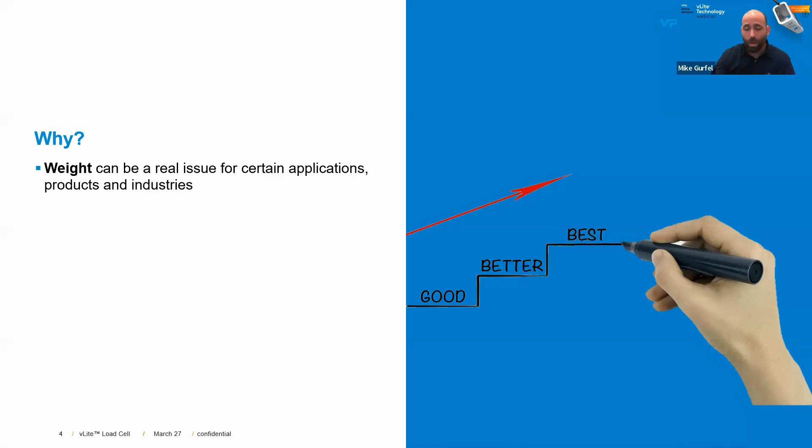Now, as I mentioned, we always ask ourselves why we decided to make the vLite product family, and there are several reasons, so we'll cover some of them now. As you can imagine, weight is always an impact, especially for applications or industries which are weight sensitive. That's one of the key factors behind the vLite being created.

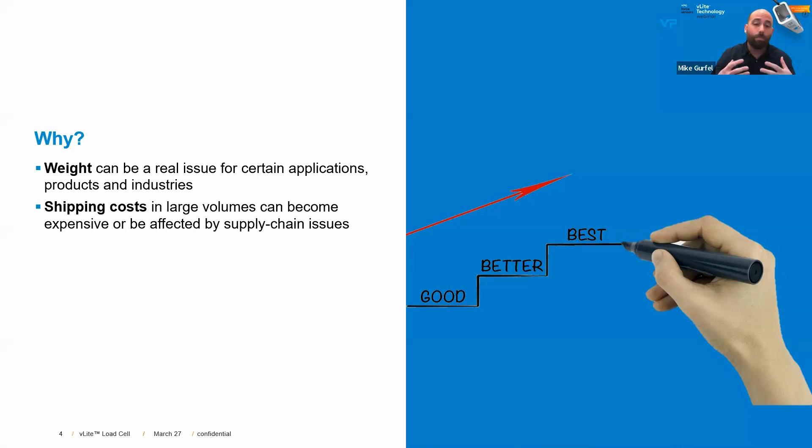Shipping costs, especially in high volumes of heavy load cells, can also be a very costly impact. As we witnessed a couple of years ago with COVID and the supply chain issues, reduced weight can be a very positive factor in shipping load cells. Sustainability, even though some companies don't put it in the forefront, is always something being talked about—going green is a buzzword—so that's also a consideration both for us and our customers and other manufacturers.

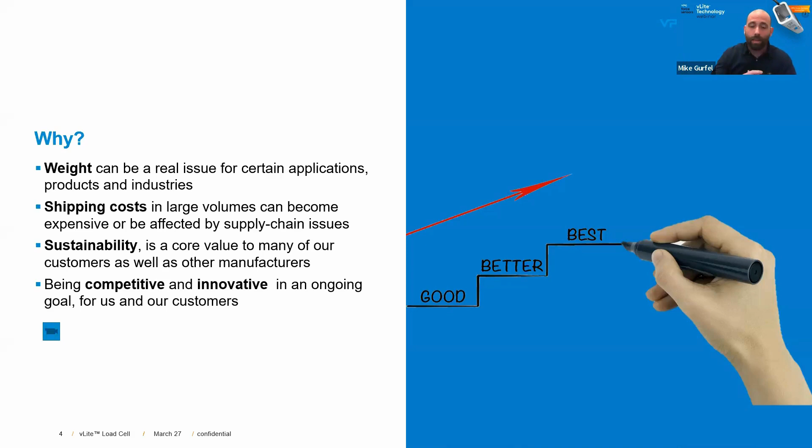And certainly not least is being competitive, being innovative—always thinking about what I can do differently, what I can bring into the market. And this is where the vLite product comes into play.

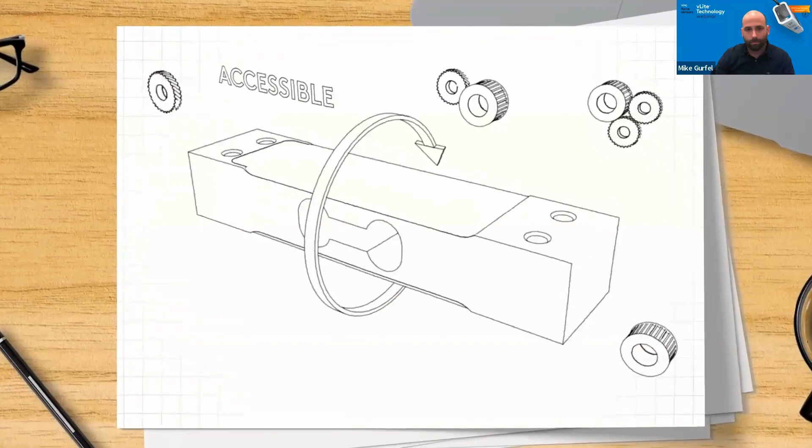Innovation doesn't happen overnight. You need to put in the time. Let's say you want to reinvent load cells—you clear your schedule and start on market research. There's no market category for your idea, so you make one. The market wants precision performance that's more accessible, sustainable, and cost-efficient. You spend years exploring innovative materials until you find the perfect one, which presents challenges you never expected. So you spend a few years on these until, eureka, a whole new concept. Time to seize the moment, just as soon as the market matures technologically. Now it's really the moment. VPG Force Sensors presents an overnight success.

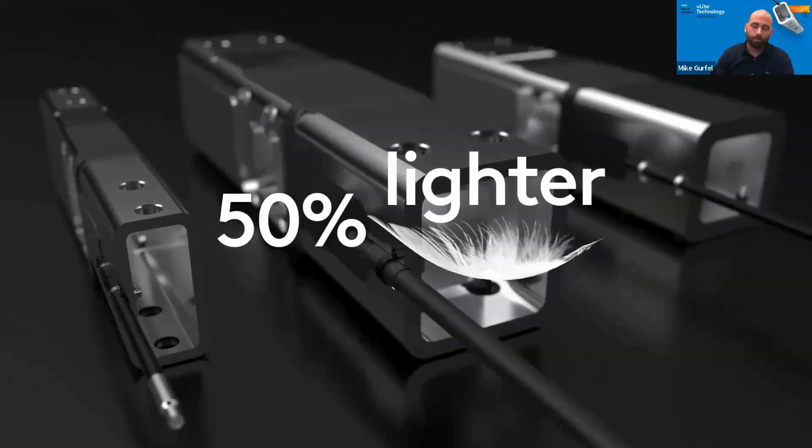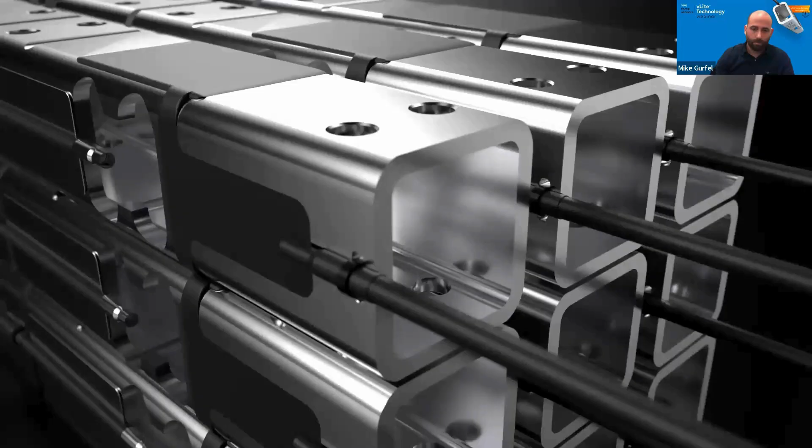VPG's patented vLite technology has reinvented load cells. Using an innovative hollow beam made of aviation-grade aluminum, vLite load cells provide best-in-class performance at half the weight of standard cells. With off-the-shelf models exchangeable for equivalent solid cells, vLite is ideal for a broad range of applications, whether as a single-point load cell or in any custom configuration. Meeting and surpassing all industry standards and benchmarks, vLite has been rigorously tested across loading arrangements, materials, and geometries. Since it uses less material, it has a lower carbon footprint and simplifies shipping and storage—because that's what nonstop innovation gets you. See the vLite difference. Visit us today.

Okay, so now we're gonna cover some of the value points that the vLite has to offer. First and foremost will be the lightweight, as mentioned, up to 50% lighter than traditional load cells. So obviously it has a direct impact on reducing the shipping and storing costs of the vLite products. It's also an ideal solution for low-weight applications, portable applications, basically any application where weight can be a very serious factor. It also allows our partners and customers to create a lighter product with existing designs, or even give new ideas and new possibilities to create a product using a load cell which almost halves the weight, which has very positive implications on the end product.

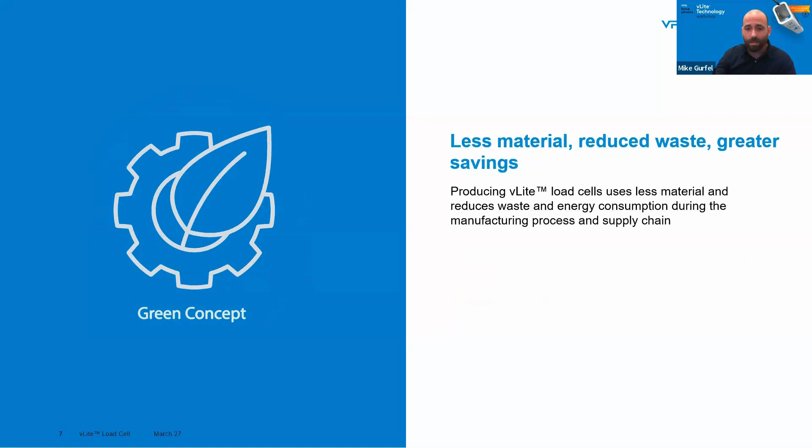If we mention sustainability and going green, it's also something to take into consideration when we're talking about less material. Reduced weight equals greater savings, so it's much more sustainable, both in terms of disposal and recycling of the product. Even if one of our customers or the company itself is not really highlighting eco-friendliness, just by joining forces with VPG Sensors and using a vLite load cell, they can also be part of our sustainability efforts to go green, reduce waste, and reduce the carbon footprint. And speaking about carbon footprint, this is affected throughout the product lifecycle, from the production process all the way to shipping until it arrives to our end customer.

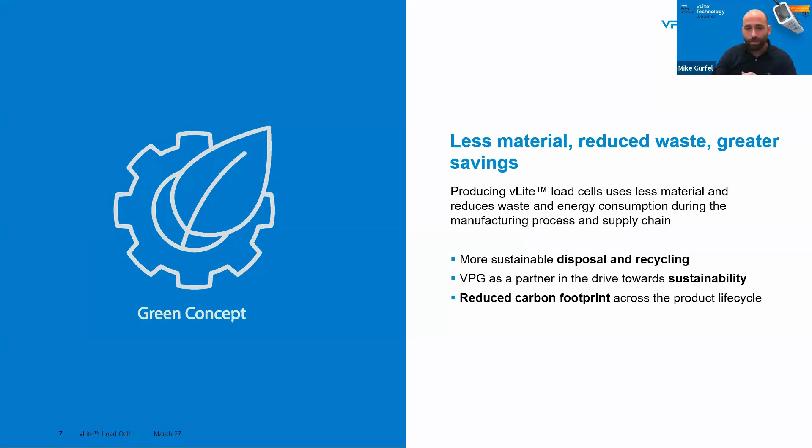Something very important to note: usually when you get a lot of pluses and a lot of value, you have to compromise on something. Here, no compromise is needed. You still get VPG Force Sensors' renowned precision, reliability, and accuracy of the load cells. It's still easily exchangeable, so no heavy lifting from the customer side to implement a load cell, even if you have an existing application with an equivalent load cell—it's almost a plug-and-play solution. And it also comes with a comprehensive 2-year warranty, so it's basically a win-win situation.

So, which industries, products, or applications can benefit from a vLite product? For this, I'm going to hand over the floor to Mark, who will probably be able to shed more light from his experience and his engagement with customers. Mark?

Thanks, Mike, I appreciate it. The vLite is an incredible advancement in load cells. I've been in the load cell industry since the early 80s, and this is the first thing we've seen that's really moved the needle as far as moving into high technology.

So if we look at what industries can benefit from the vLite, we've got packaging. Within the packaging industry, there are all types of automated processes where products are weighed as they're going down the assembly line. The vLite is designed as a single point load cell, meant to be used with a platter on top of it. This can weigh any type of product as it's being packaged. It can also be used at the end of packaging to verify that, as you know, when you buy something, it always says the content is verified by weight, not by volume—so that weight is verified.

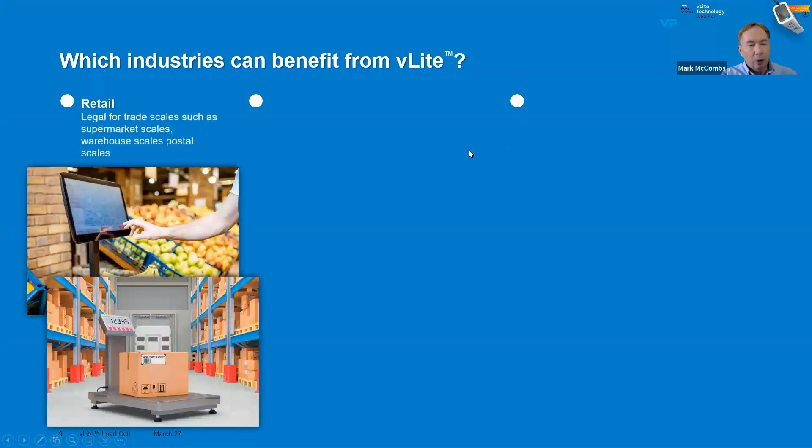And in medical, which is something close to me—that's a segment I manage—this is incredibly useful within medical beds. Within the medical bed itself, the vLite is a very lightweight load cell and can be used for different types of applications, not only in medical beds but within stretchers and also within incubators. In addition to just the basic weighing of patients, it can be used for different types of fluid monitoring, such as hysteroscopy machines or any type of saline monitoring used in procedures. So it really lends itself to that.

And also, as we talked about packaging, let's talk a little bit about retail—so retail scales such as supermarket self-checkout. If you've done self-checkout, you'll notice sometimes you put something down and it asks you to rescan it.

What's happening is that self-checkout is actually weighing what you just scanned to make sure that what you scanned is actually what you're putting in your bag, to make sure that you're paying for exactly what you purchased.

And then also for warehouse type applications, you can imagine the vLite being used within a platform scale, a small scale, aircraft industry, as well as baggage weighing at kiosks in airports. So very versatile. The single point load cell is probably the most versatile load cell you can buy for any type of different application. They can be used singularly, or in pairs, or even four, one in each corner, like a platform scale.

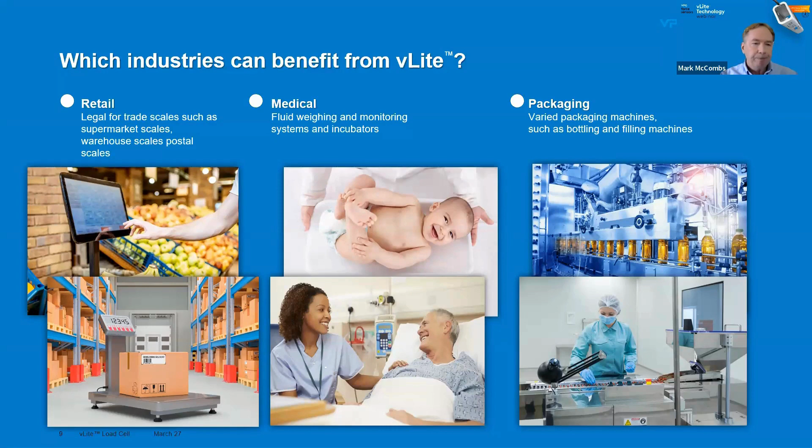So the vLite product line currently consists of 4 model families, and we're going to bring you a quick overview, and later on Rahav will do a deeper dive into each model family. So you have the model 0022, model 0031, model 0042, and model 0038.

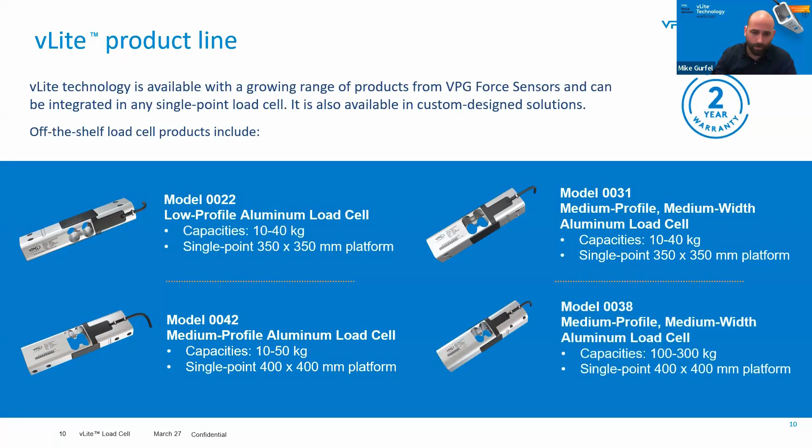Now, in terms of certifications, since it's something new to the market that we worked quite a lot on before launching it, the vLite product line is US patented and NTEP certified. Every load cell model, between 10 to 50 kilograms, is NTEP certified with US patent and worldwide patent pending. So you can expect some more certifications, as well as OIML certifications, coming in the very near future.

And to give you some more information on that, as well as going deeper into each one of the models, let's have Rahav join us.

Hello, everyone. For some reason I'm not allowed in on my video, but hopefully you can hear me. Yes, now we can hear you, and we're going to work on the video. The video is not starting, but I will continue.

So, hello everyone. We're excited to have this webinar with this innovative product line. As mentioned before, and as the vLite name implies, it is a very lightweight load cell.

So if Mike, if you want to continue the slides, here I am. Thank you. So hello everyone, again. I will go briefly over the major models of the product line.

So if we start, the first one is the 0022. If you're wondering what the numbers at the end signify, that's the height in millimeters. So the 0022 is 22 millimeters high, and it's equivalent to our 1022, which is also 22 millimeters high. It's designed for platforms up to 35 by 35 centimeters. Currently, we have it in 10 to 30 kilograms, and the specification matches the 1022 or any equivalent competitor. We have this with through holes as seen here, but we also have a version with integral threads. So with the integral threads version, it's a direct one-to-one replacement with any equivalent.

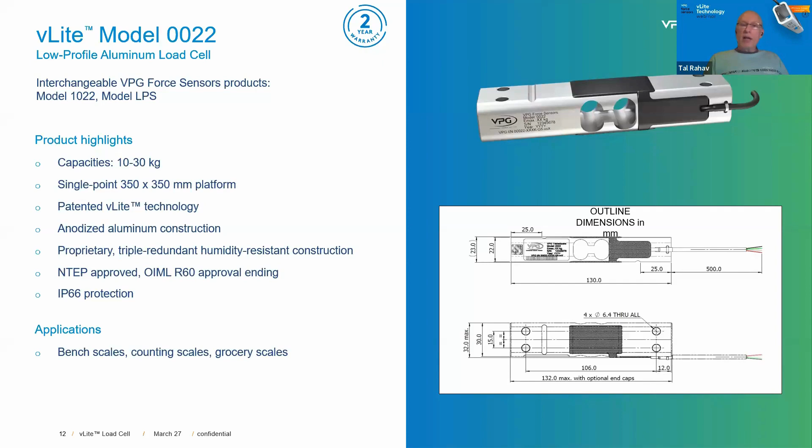Moving to the next model, the 42 - the height is actually 40, but 42 signifies the equivalent with the 1042. So it's actually 40 millimeters high, but the decision was to keep the 42 to maintain the connection with the 1042 it's equivalent to. This geometry is slightly taller, and therefore good for bigger platforms up to 40 by 40 centimeters. Currently available up to 50 kilograms, slightly higher capacity than the 0022. This as well is available with through holes or integral threads.

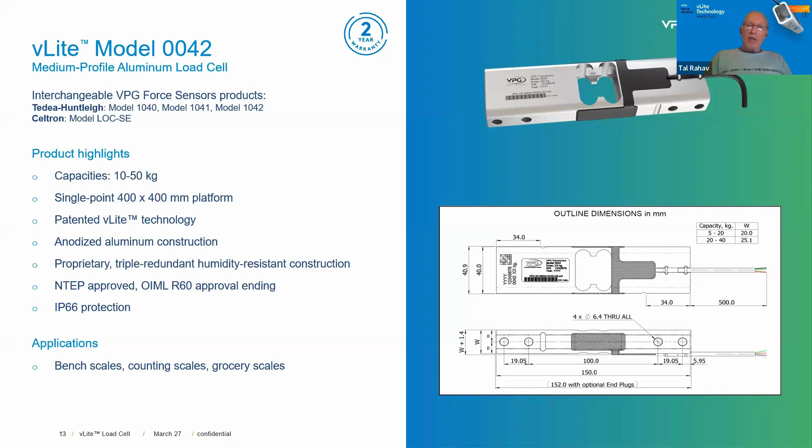So we move on to the next one, the 31. 31 is the height, actually it's 31.4. Other than the height, it's identical to the 0022. The 0022 is 22 millimeters high, this one is 31.4, same capacity range - well, slightly higher because we have a thicker wall on this profile, so we can go higher in capacity. The platform size is 35 by 35.

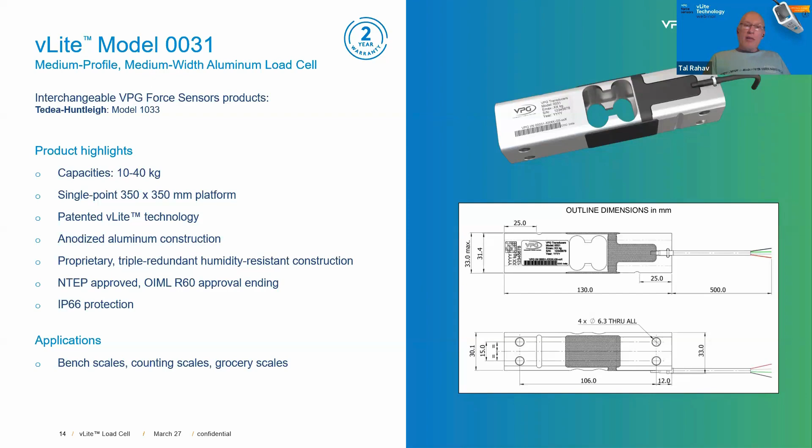And the last one is the 0038, and as the name implies, it's 38 millimeters high. Here we go up to 300 kilograms, a big step upwards for larger platforms, 40 by 40. We may, in the near future, extend it to maybe 40 by 50, depending on requirements and additional testing. On the 0038, we only have integral threads, so this is a true direct replacement for the 1242, which is our current standard for these capacities.

All of them are patented, approved, certified - patented in the US with a pending patent for the rest of the world.

So we'll move on from here, and I will be happy to take questions at the end of this session.

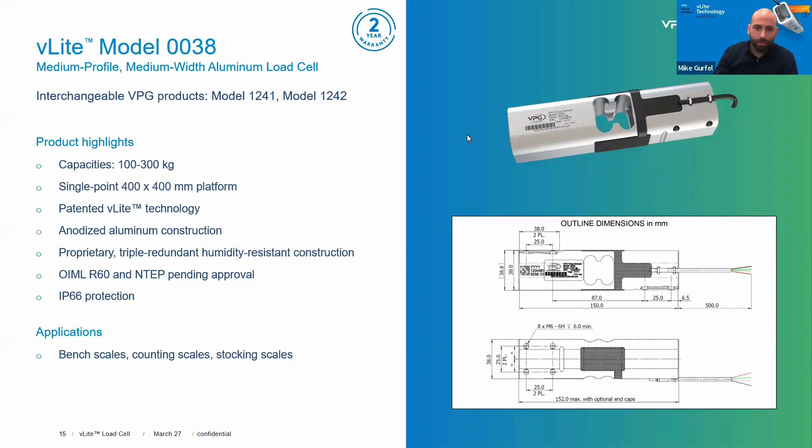So if we just wrap up some of the things we covered about the vLite product family. In a nutshell, you get a load cell that can be up to 50% lighter, and as Rahav mentioned, even more than that depending on the model, which in turn can reduce the shipping costs and even the end cost of the product itself. You still get to be part of the green movement with an eco-friendly product, both in terms of production and shipping and the carbon footprint and all the other values we mentioned. And you can get all of these things while still retaining the reliability, the precision, and the 2-year warranty that VPG provides for the vLite lineup.

So as we said previously, it just makes sense. It's a win-win situation. You can exchange it quite easily with an existing equivalent load cell. You're basically losing nothing but gaining a lot more. Plus, it allows our customers, manufacturers, whoever it might be, to come up with new ideas and new products that can leverage the benefits you get from vLite.

And now we're going to go over some of the questions that we have. The first one is for you, Tal.

So we have a question: do we machine these elements from a standard extruded box bar, or do we machine this box bar as well?

So for the vLite, we invested in custom profiles. This is an extrusion, so the wall thickness is net shape. We only machine the upper and lower surfaces where the mounting takes place and where the strain gauges are bonded. The sides are not machined, the internal surfaces are not machined. This maximizes the material saving and the energy expenditure.